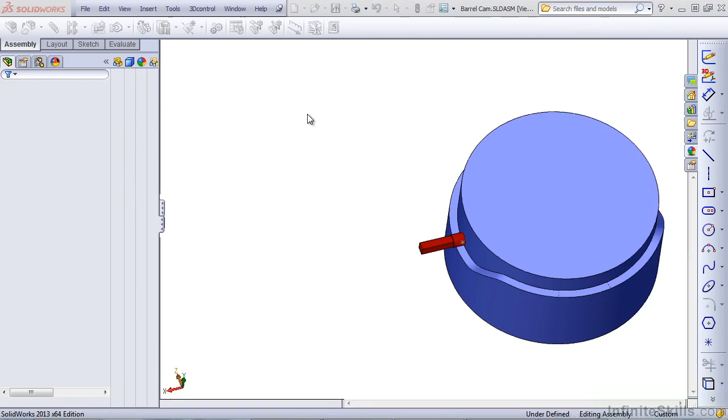In this lesson, we're going to talk about how to create a barrel cam. Open up the barrel cam assembly from your Chapter 7 folder, and you'll notice right away we've got a couple of things to talk about. The first thing that we have to talk about is how to create the barrel cam itself. And the second thing to talk about is how to create the mates to make an assembly like this work.

So let's open up the barrel cam. We started with just a simple cylindrical extrusion, and then we used the wrap feature to either add or remove material to the barrel cam. Within the wrap, you would use either emboss or deboss. Emboss is adding material, deboss is removing material.

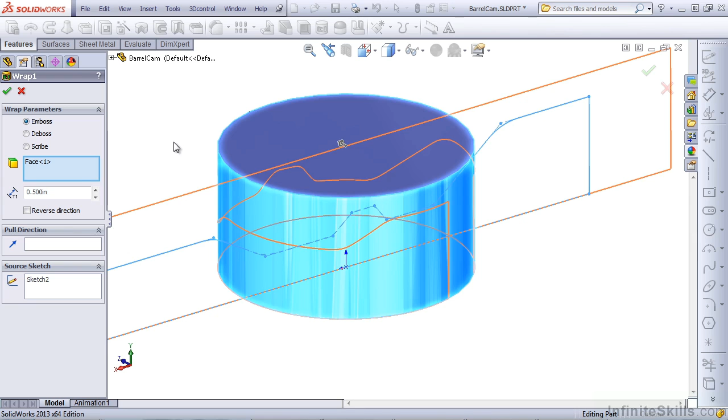Also, within the wrap feature, notice that we've got a sketch. And if you remember back to our lesson on how to create a wrap, you just sketch a closed profile and then wrap it onto the face. Let's take a closer look at how to create that sketch. Your cam profile needs to be driven by transitions and dwell at various levels, and I'm not going to get into the details of cam design here.

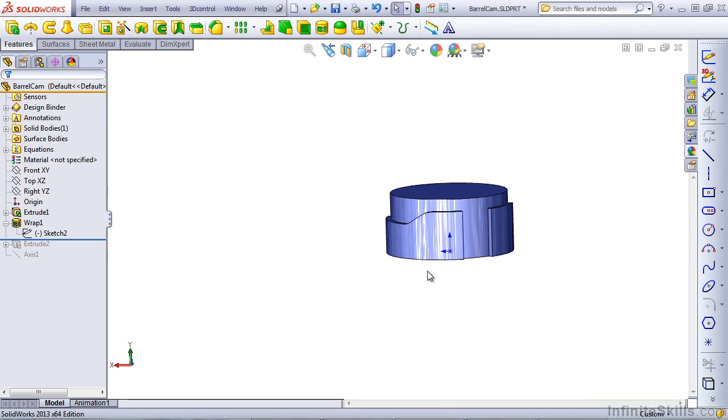But in order to make the wrap work correctly, I made the two ends of the cam profile at the same level. And then I made sure that the length of the profile is shorter than the actual circumference, so that when it's wrapped, there's a gap in between the two ends. Now this accomplishes a couple of things, because you're not going to get this accurate enough just by using 100 decimal places to pi. I just open it up and leave the gap. Remember that the circumference, which is the length of the circular edge, is equal to the diameter times the constant pi, which is 3.1415, and so on.

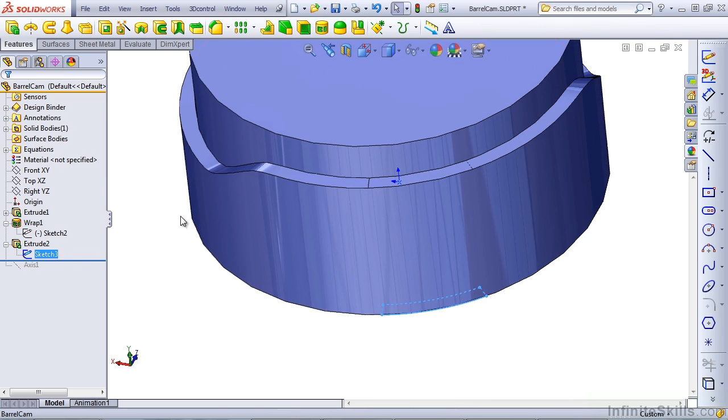To close up this gap, it makes it easier if the two ends are at the same level, and so I just created an extrude. Using a sketch, the extrude goes up and finishes off the cam track very nicely. Also, in this part, I've added an axis. If you can get in the habit of using axes in all of your parts, it will make your life a lot easier, especially in rotating parts.

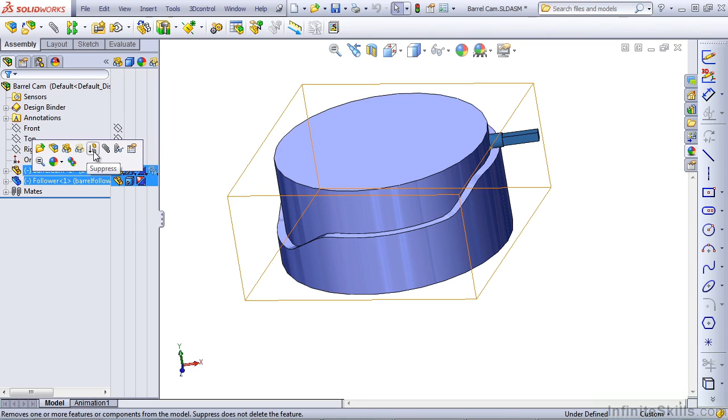Now let's flip back to the assembly and see how all of this was set up. Let's first look at the mates that are on the barrel cam. I'm going to suppress the follower and expand the barrel cam, and then expand the mates in barrel cam. So I've got two mates here. A coincident, which is plane to plane, the top plane of the part and the top plane of the assembly mated together. And then I have a coincident mate, which is the axis that goes through the center of the part and the assembly origin. So this produces the correct motion, which is just for the barrel cam to be able to spin in place without moving or tilting. So that works well.

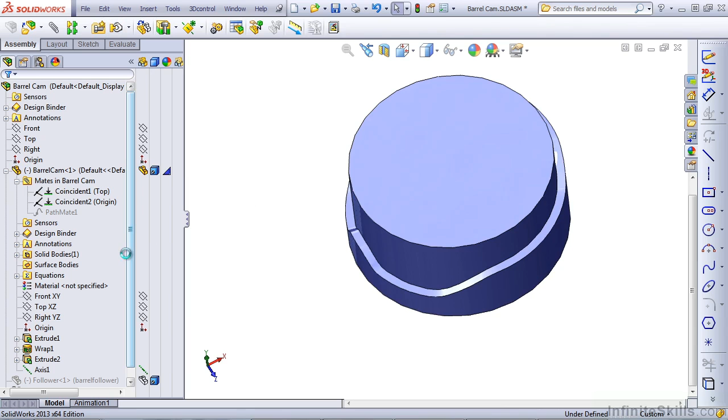Now if we add the follower, I'll right-click on this again and set to resolved. That also reactivates the mate. The follower in this case is just a cylindrical end on a rectangular cross-section post. And then notice one other item. There's a sketch point at the bottom of the cam follower. Now this introduces a bit of inaccuracy, but unless you're doing motion analysis or real detailed time studies or things of that sort, this sort of motion will be okay for visual reference. It will probably not be okay for anything that requires a lot of accuracy, however.

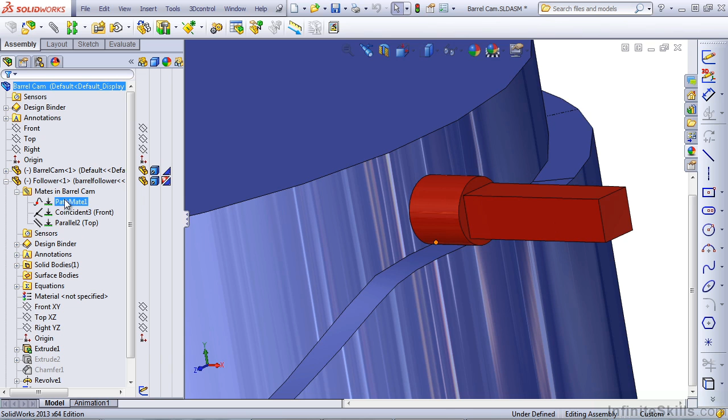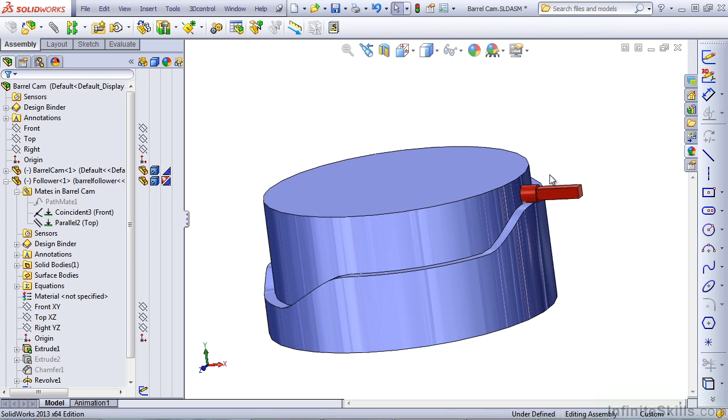So let's take a look at how the follower was mated into place. We used the path mate, but we'll get to that eventually. In order to position the follower correctly, the top plane of the follower was made parallel to the top plane of the assembly. That allows it to move up and down, and then an axis through the part was made coincident with the front plane. So if we suppress the path mate, the only types of motion that are allowed at this point are for it to go up and down and in and out. We could constrain it further using reference geometry, maybe a distance mate from the end of the follower to the axis of the part, but the path mate does all of that for us.

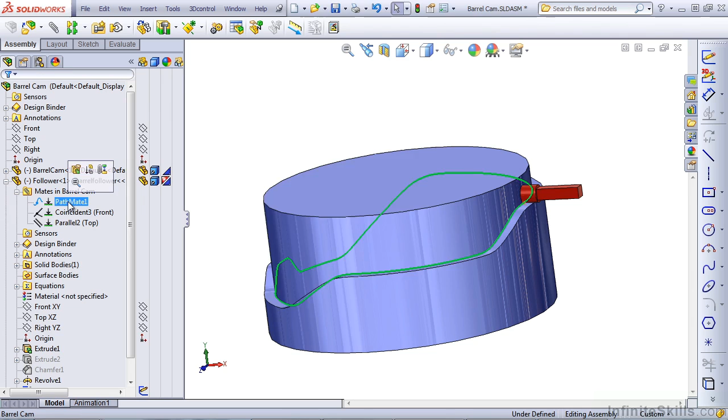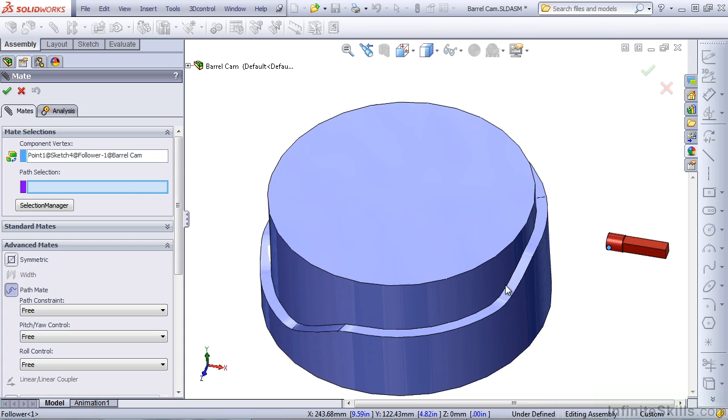Let's first unsuppress the path mate and then edit it to see how it was created. The path mate requires a point on the follower and then a path selection. Let's actually delete the path mate and recreate it. So I'll pull this out of the way and let's create the path mate. Path mate can be found under the advanced mates and called path mate. Component vertex is this sketch point, and path selection is going to be this interior edge. Now the interior edge is actually made up of two edges because the wrap feature was just like a spline and it constitutes a single edge. But where we created the extrusion, that's a separate edge.

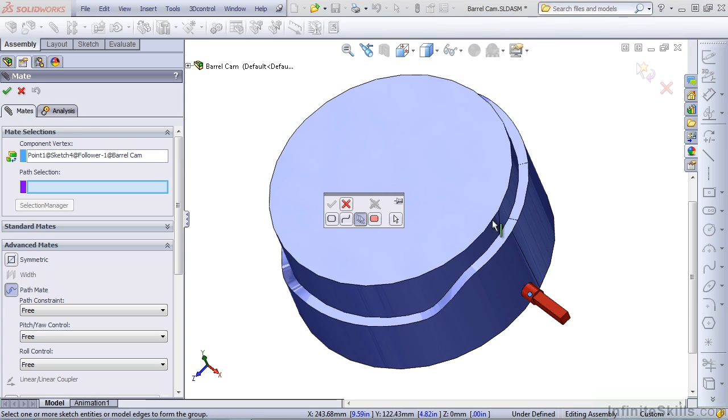So what we really need here is the selection manager. Remember that the selection manager is available on a right mouse click, selection manager. We want to click on the select closed loop, and if I click in here, it's not getting it. So let's use select group. We can select on that edge and this edge, and when we have the two selected, right click. SOLIDWORKS puts that closed group into the path selection and moves the follower onto the cam. From here, we can rotate the part.

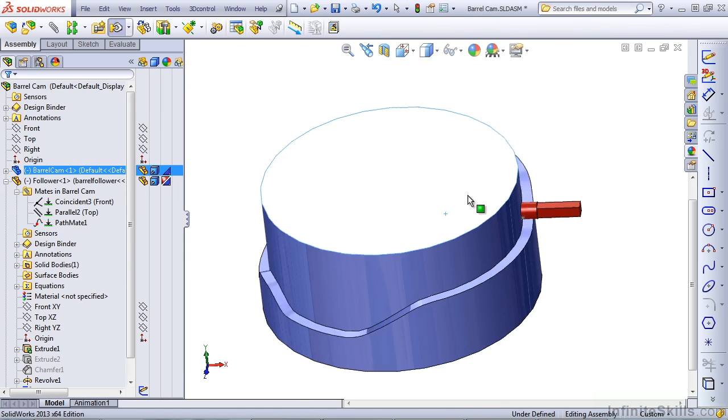And I just want to point out, we were talking about inaccuracy. The greatest inaccuracy is going to be on the steepest slope. You will notice that because if this point is following the edge, then this sort of motion is only going to be correct if the cam face is entirely flat. And if the cam face is entirely flat, you don't have any need for a cam in the first place. So just be aware that using this method is inherently inaccurate to some extent. It may work for the purposes of a visual simulation, however.